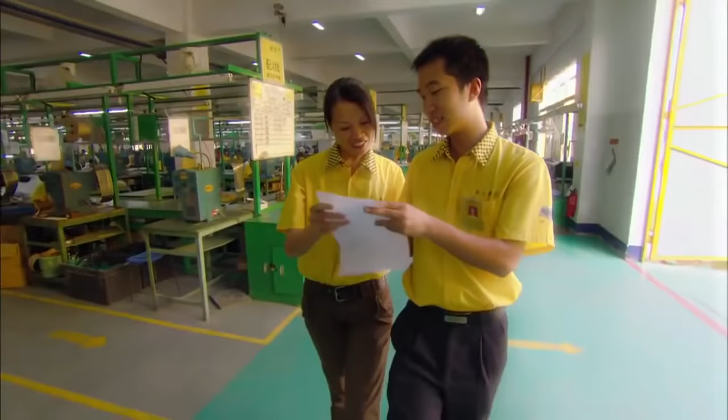What's it like to live where you work? For most of us, that's unthinkable. But imagine living and working at one of the biggest factories in the world, a workplace the size of Monaco. For these 17,000 employees, it's reality. They come from all over China, seeking a brighter future at this factory called UPA.

Workers craft coffee makers, irons, and electric grills in staggering quantities every single day. But UPA is more than a steady paycheck. It's home. People get married here. They send their kids to school here. But the work never stops.

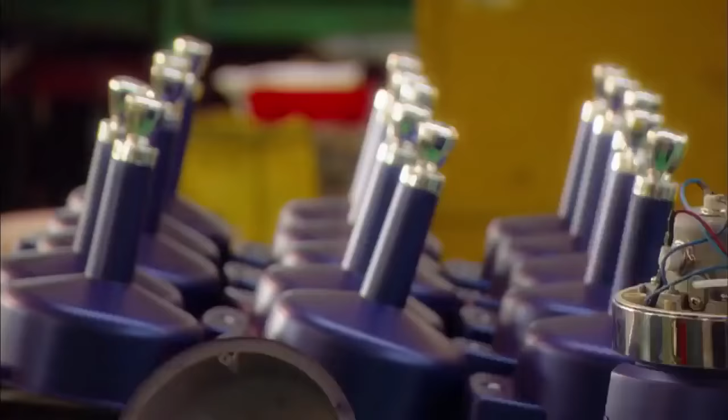UPA's managers are on a mission to produce new products for every corner of the globe that could forever change the way we think of made in China. Step behind the closed doors of modern China into a factory the size of a city.

Welcome to the place that calls itself Factory of the World. By the time you finish watching this program, UPA's 17,000 Chinese workers will produce nearly 20,000 electrical appliances.

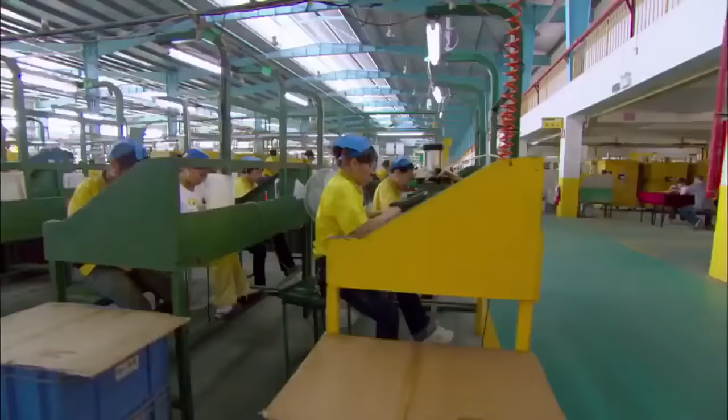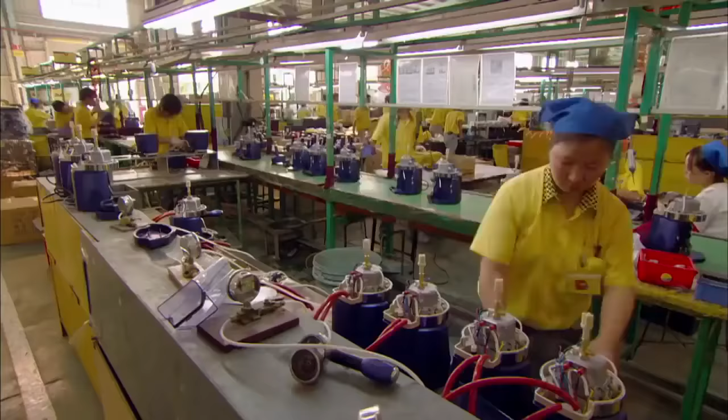Every day they churn out 60,000 irons. Every month, UPA makes 36,000 coffee makers. That's 2 new machines for every Starbucks on the planet. And every year, these laborers produce a staggering 18 million electric grills. Stacked side by side, they'd span the Atlantic from New York to London.

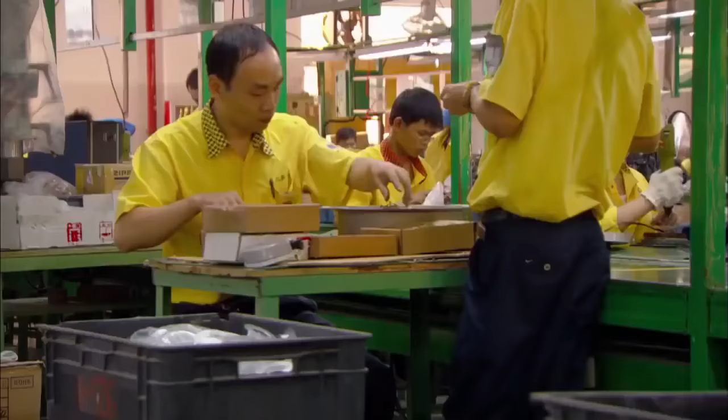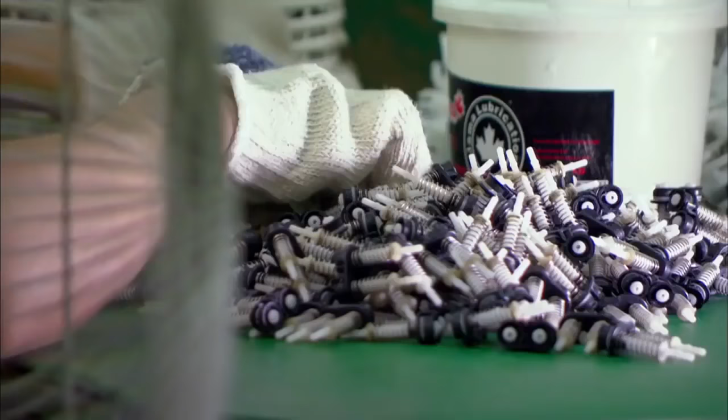Chances are you own something built right here. Factories like these don't exist in North America or Europe, but they're not uncommon in China, where labor is cheap. UPA runs on human sweat alone. No need for robots. To ensure non-stop production, workers need a steady stream of parts.

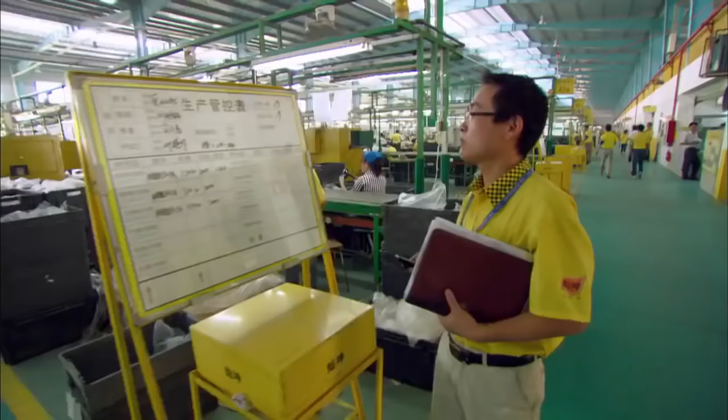I'm in charge of production control. Production control is the brain of the factory. Its main function is to coordinate each department.

If any of UPA's factories run out of parts, Mr. He's job is on the line.

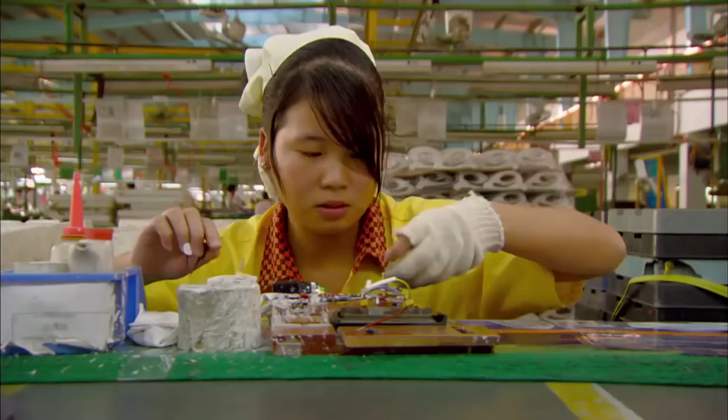The production line cannot wait. We have to guarantee that our production is smooth. Running out of materials would affect our efficiency, affect our productivity, and affect our revenue. So I have to fix this in the shortest time possible.

Today, a problem at the iron factory needs smoothing out. Workers on the iron line are low on a crucial part.

To keep up production, they need 2,000 units, and they need them now.

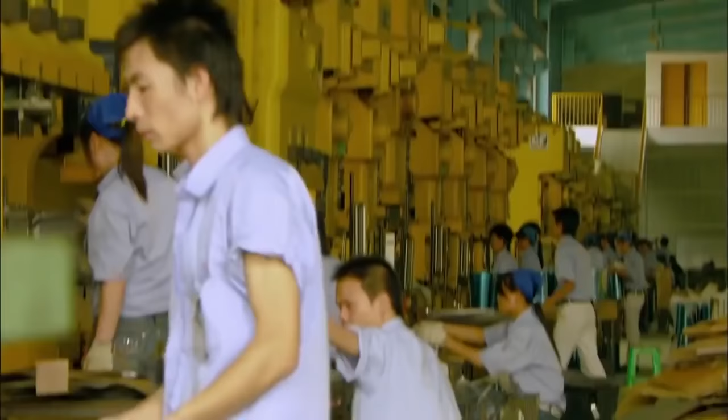Traditional plants use outside suppliers for their components, not UPA. To slash costs and stay competitive, UPA builds its own parts on site. So Mr. He's supplier is only a bike ride away.

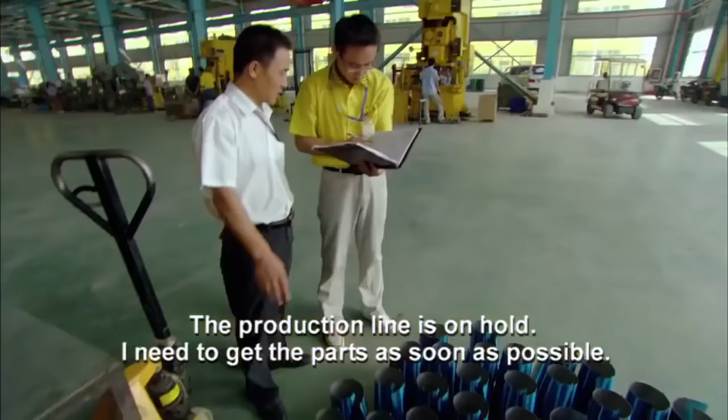But even the supplier is dangerously low on stock. Mr. He has found barely enough parts to last the day.

Then he gets another urgent call, now the grill factory is low on a crucial component.

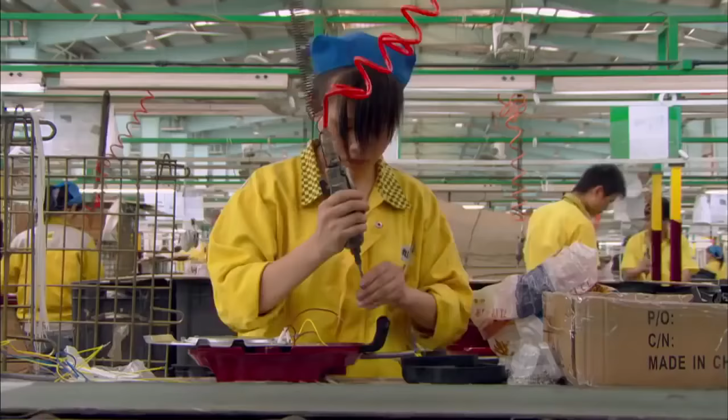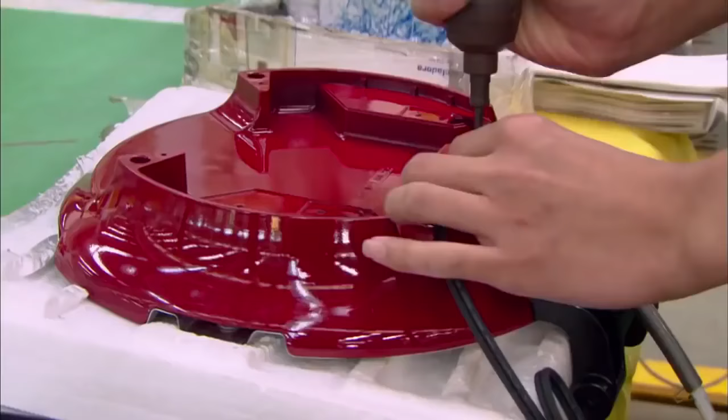Grills are the company's most profitable products. Yupa started producing one line of grills in 1994. Now, 60 assembly lines churn out 800 different models. Workers make one grill every 12 seconds. That's 50,000 grills per day, or 1.5 million per month, enough grills for every person in Dallas. Grills bring in $350 million a year, but Yupa wants more.

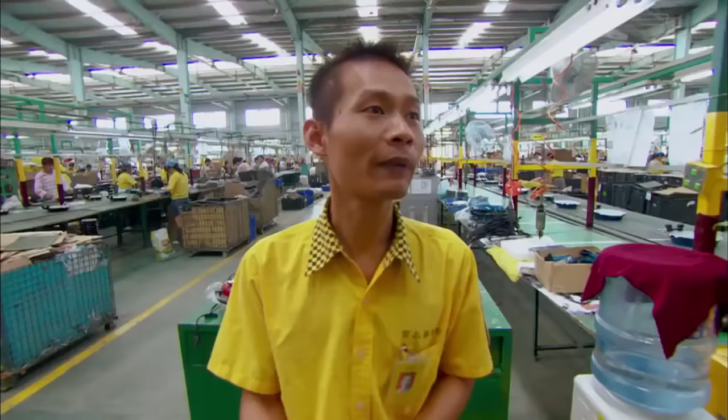Little wonder Lu Jinye acts like a general leading his troops to war.

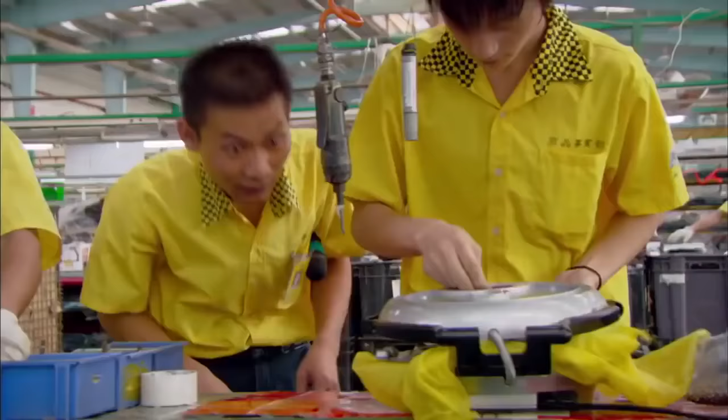By next year, managers expect workers to crank out $500 million worth of grills. Yupa's profits have to rise to outmuscle the competition. Mr. Ye supervises 850 workers on 30 lines.

We have to coordinate all these workers and pull all their thoughts into one. It takes teamwork to accomplish our goals, to get the results we want.

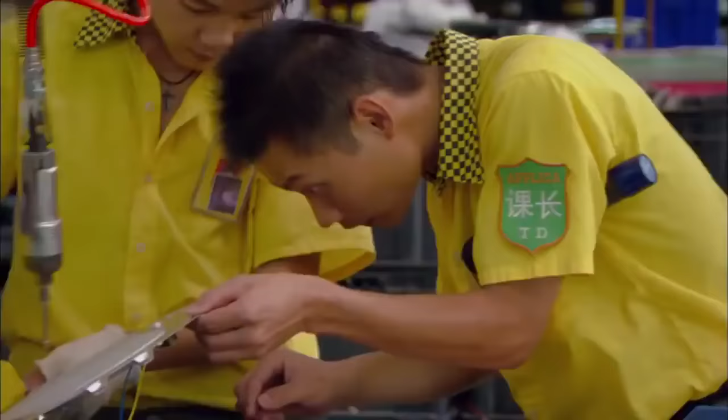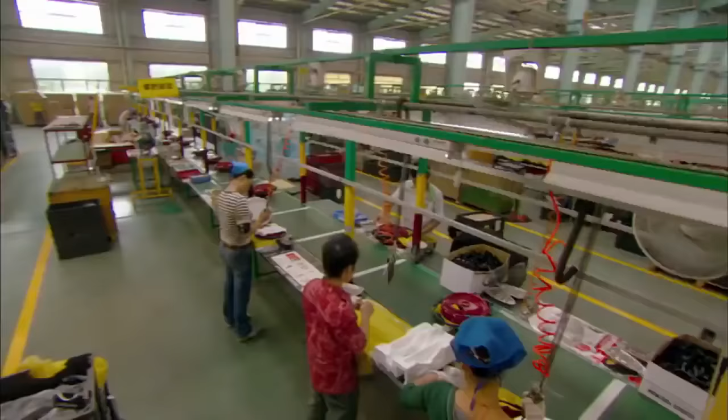Mr. Ye is obsessed with quality control. His aim? Boost output without compromising quality. In a factory this big, with a production run so massive, even the hyper-efficient Mr. Ye hits a roadblock.

This holder piece holds the grill plate. What we're seeing now is the assembly of this piece. The problem is the size. It's the wrong size.

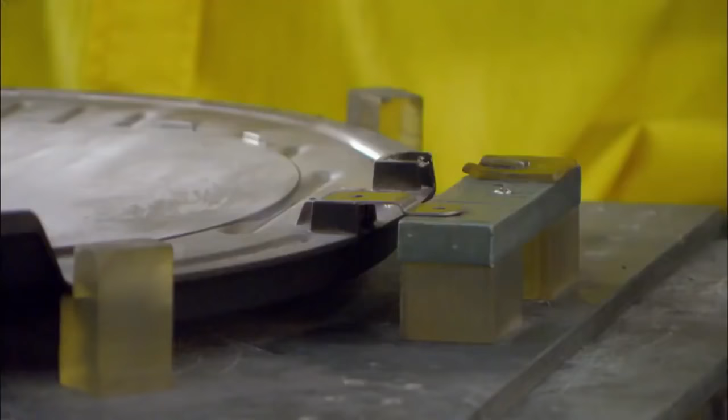They've run out of part number 2627. It attaches the core heating element to the frame. Without this simple component, assembly lines will shut down, unless Mr. Ha finds a fresh supply, and soon.

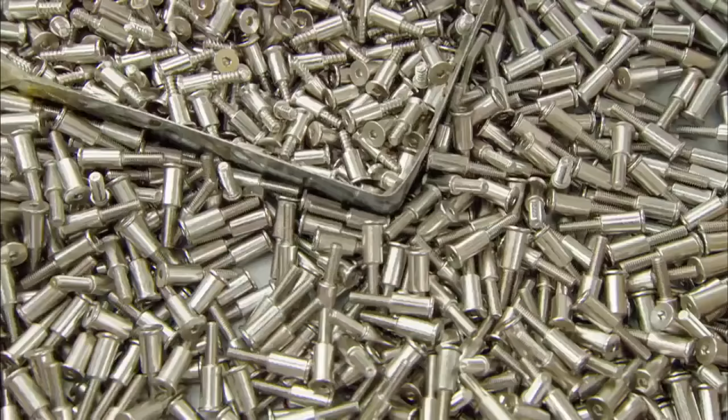If we don't get them the parts, 6 production lines will have to stop. When every part is on hand, grills assemble like a simple puzzle. Wires are linked to the heating element, and the element is fixed to the plate.

When it's not locked down properly, it will fall off. If it falls off, it will burn the hands of our customers and consumers. This job is very important.

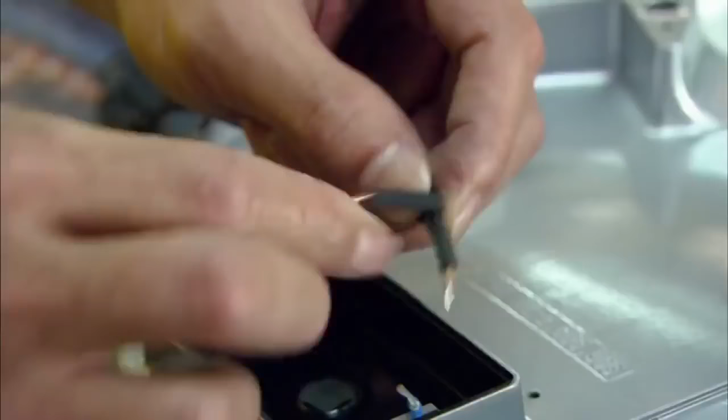Then it's time to connect the power cord. The brown wire is live and the blue wire is neutral. The one with the writing on it matches the brown wire. Connect them and that makes the wire live.

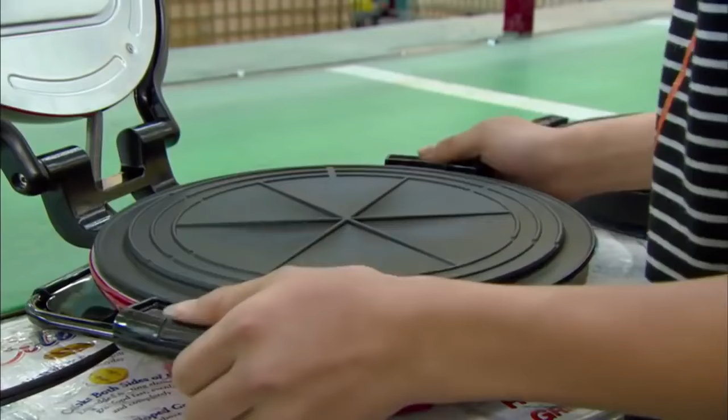Each grill is inspected for flaws in construction or appearance. Finally, every grill is tested to make sure everything is in working order.

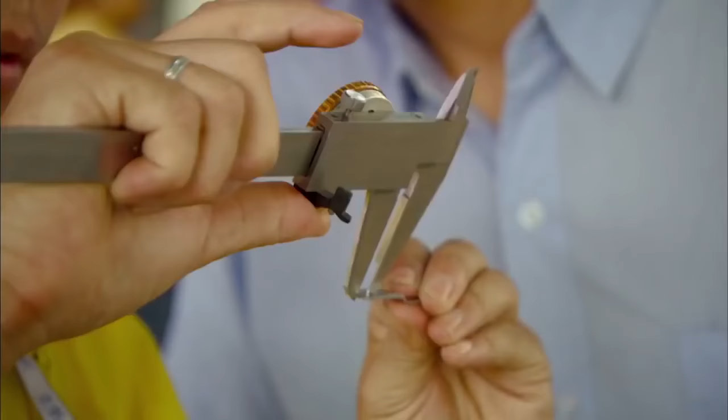On a typical day, Mr. Ye's team must make 700 of Yupa's 50,000 grills. Missing parts cause delays, cost Yupa a fortune, and force workers into overtime to meet their quota. Finding the missing parts falls to Mr. Ha, and the pressure is on.

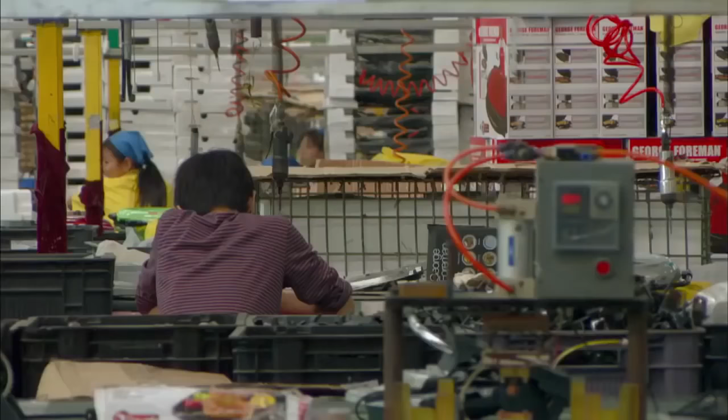Mr. Ha finally arrives, and he has good news.

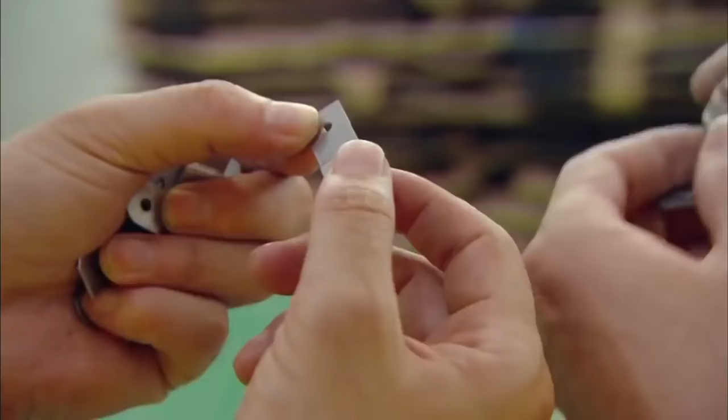Mr. Ha's day has ended on a high note.

He heads home to a company-subsidized apartment only minutes away.

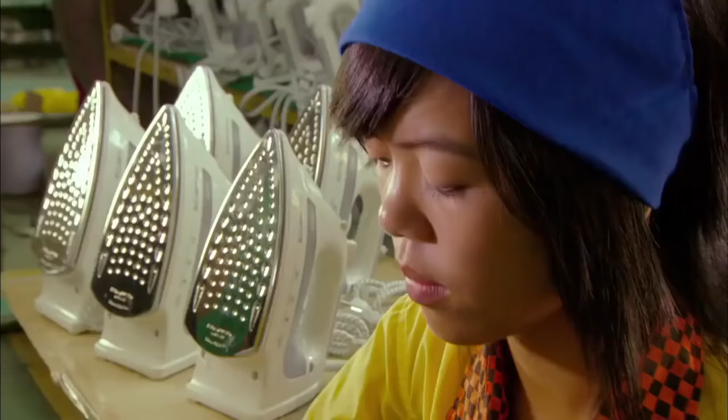It was really tough in the beginning. EUPA's next generation of workers must leave their families behind and devote their lives to the company.

It's a place tourists never see. The new face of modern China, competitive, hungry for profits, and ready to take on the world. Located near the city of Xiamen, the EUPA complex sprawls for 1.8 square kilometers, almost the size of Monaco.

We have about over 20 buildings here. You know, the largest building is equal to 4 football fields. You can have 60 to 70 assembly lines. Each assembly line can have 25 to 35 workers in the line.

25 years ago, there were no factories here, only farms. In the 1980s, the Chinese government decided capitalism wasn't so bad after all. The communist regime established so-called special economic zones, designated places for free markets and foreign investments.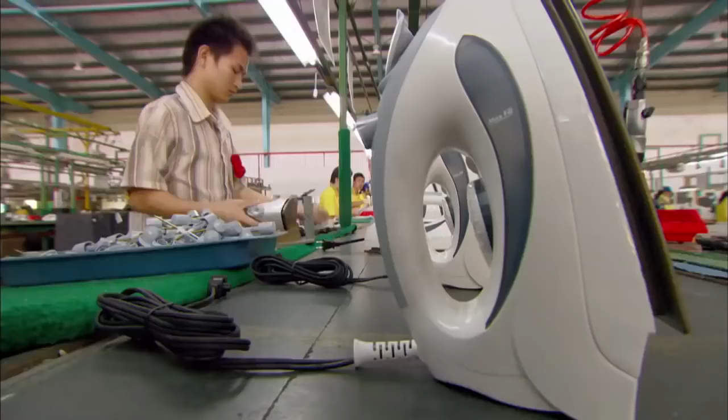Yupa, a Taiwanese company, moved here in 1988. In a few short years, it became the largest manufacturer of irons, electric grills, and espresso makers in the world.

Yupa is a city unto itself, with restaurants and convenience stores, soccer fields and basketball courts, and living quarters for everyone from students to families. Success made it big, and size keeps it successful. Mass production runs push down costs.

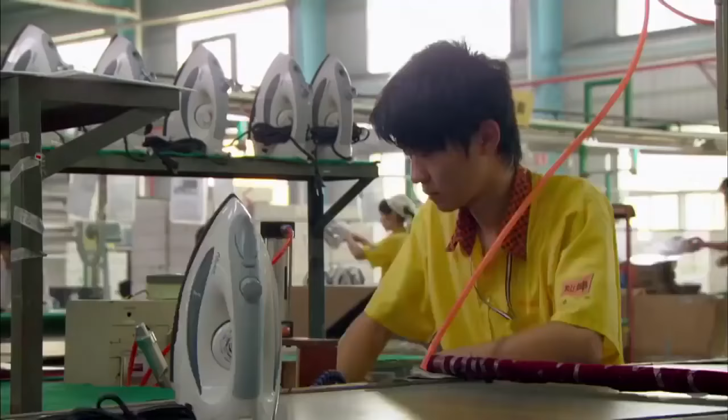Almost all parts are made on-site, keeping supply costs low and parts within easy reach. Because we are in this location, pretty much isolated, we don't have satellite suppliers surrounding us to build parts for us. So we had to do it in-house, and we had to do it on a large scale.

Yupa's main advantage is a cheap and endless labor force, ready to work for a fraction of a Western wage. 16-year-old Mao Fen Guo left her family and came here in 2008.

But Guo isn't just looking for work. She's here to escape poverty and make her mother proud. In China, many parents prefer sons to daughters.

My mother has only 2 daughters. She's always upset about that. And in order to not let her down, I must work harder and harder.

Guo is a worker in training. With about 1,000 other students, she attends Yupa's on-site trade school. To get here, she had to pass entry exams and pay Yupa tuition. Now she's enrolled in 3 years of study and hands-on training at the factory. If she does well, Guo hopes for a job at Yupa.

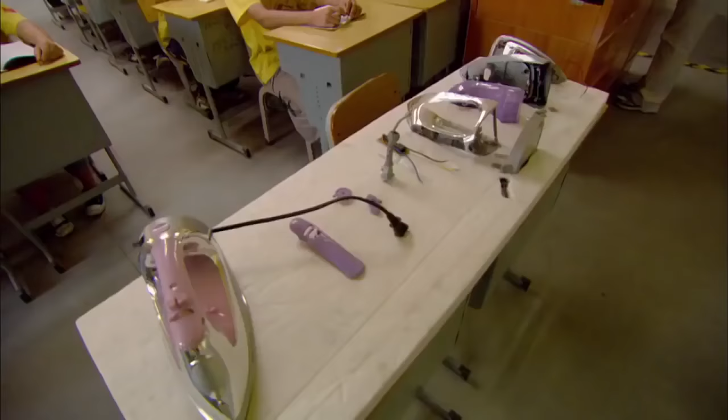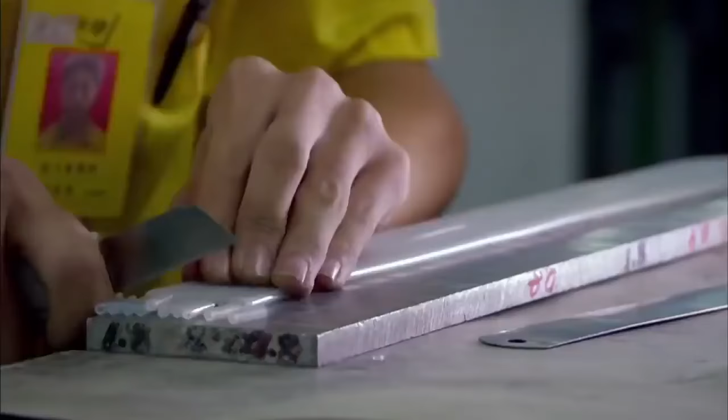To get a job, Guo must learn the ins and outs of every product line. We're changing constantly. Last time, we were making grills. Then we changed to coffee makers, and now electric irons.

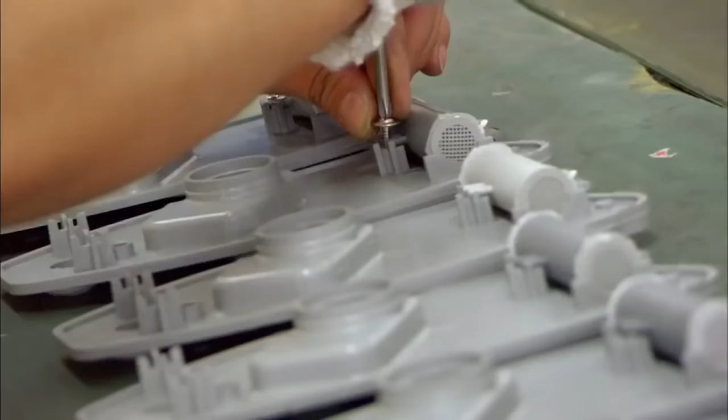Workers on 27 production lines pump out an iron every 15 seconds, and as many as 60,000 irons a day. Production includes at least 10 separate brands for dozens of companies. With over 30 steps to assembly, iron making is intricate work, and there's no room for error.

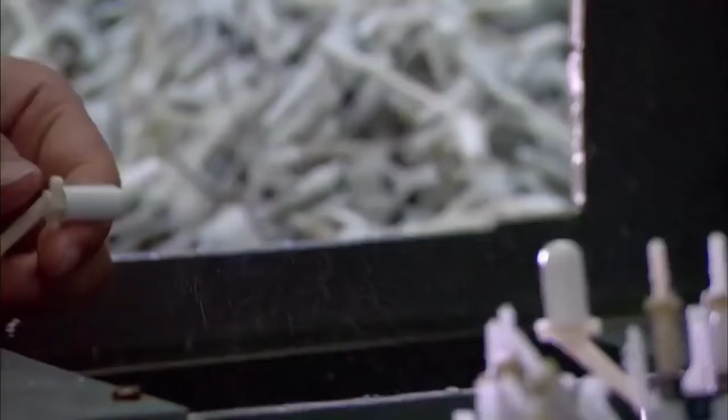Assembly starts with a water spray unit, made up of springs, rubber, and washers. With training and practice, it snaps into the spout in seconds. If it's not closed tight, it will leak or blow.

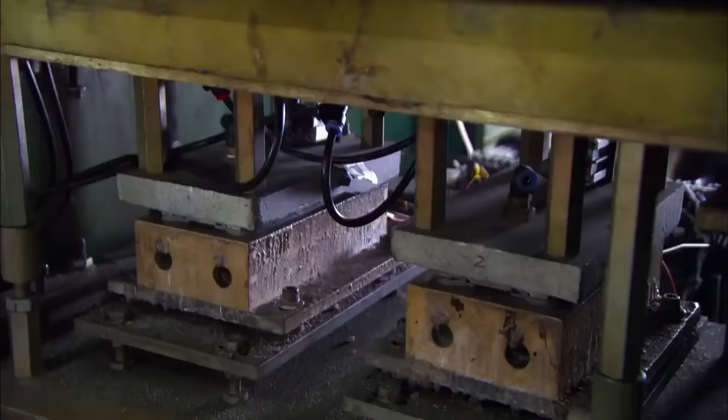Then it won't work properly. Now the sprayer and spout are joined to the handle. The two parts of the water reservoir are placed in a heating machine, which melts the seam between them and makes the reservoir watertight.

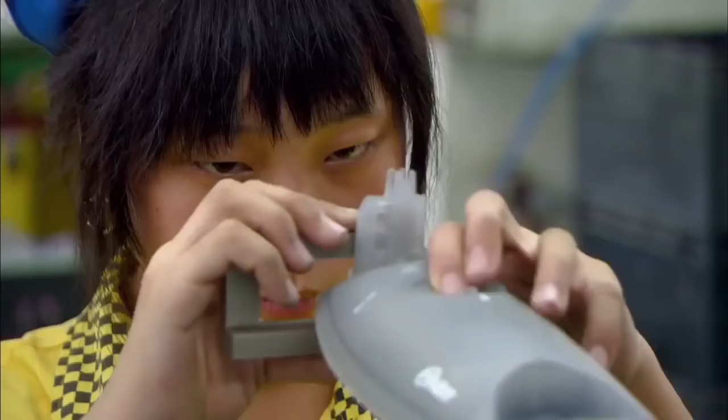Welding is an important part of production. However, it will be easy as long as we follow our operational guidelines. Next, the thermostat is attached to the base.

You need to make sure you're using the correct base before you insert it. Using the wrong base can lead to fire. Wiring is also important. Where there is a wiring mistake, there's hidden trouble.

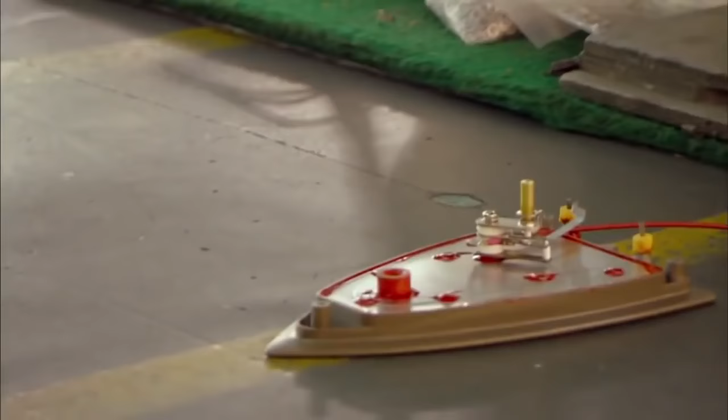A plastic buffer is placed between the heating element and the handle to keep the handle and the user's hand from getting too hot. After that, the plug is welded to the back of the iron.

We're connecting the wire for the power supply. I can do about 4 to 5 pieces every minute, and 300 pieces an hour.

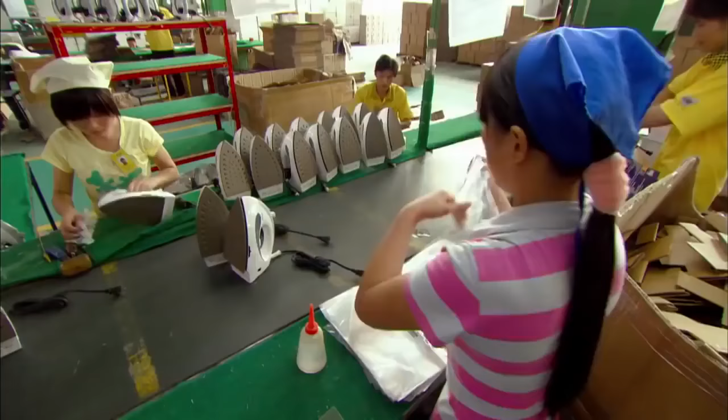Once the spray and steam buttons are attached, it's testing time. First, the steam and squirting functions. Second, the iron's electrical system. Faulty units are either repaired or removed. Finally, irons that pass inspection are packed up and shipped away.

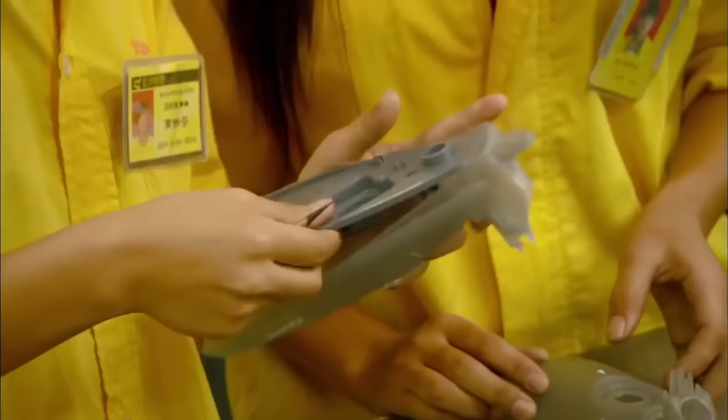The team won't cut corners or settle for second best. Today, Guo and her classmates will put classroom theory into practice and work the iron line. For a teenager from a small town, living and working in a giant factory can be overwhelming.

My life is not as hard as it was before. I'm getting used to this place now.

Work on the iron line goes better than expected. For Guo, juggling work and school isn't that difficult. The hard part is leaving family and living far from home.

I guess it's learning how to be independent. When I first arrived here, I didn't know anyone else, and we all have to live together. It was really tough in the beginning.

Like China, Guo is adapting to a new world of high technology and tough international competition. And like China itself, she's determined to succeed.

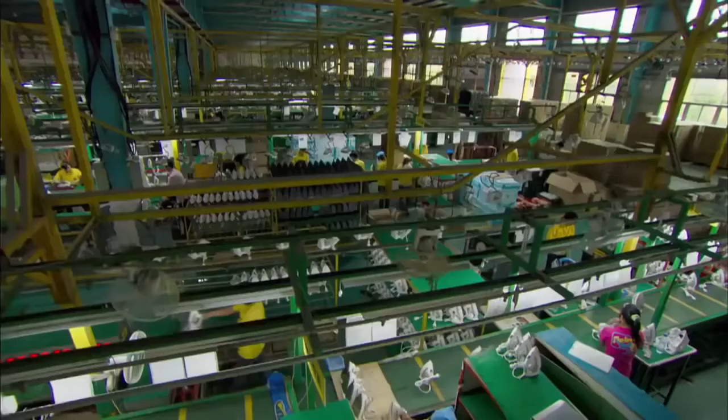I don't see myself working on the production line forever, doing the same job. Maybe I'm a bit arrogant or too confident about myself, but I want a better future.

For some people, a better future keeps them married to their job. Workers at UPA are married to the company.

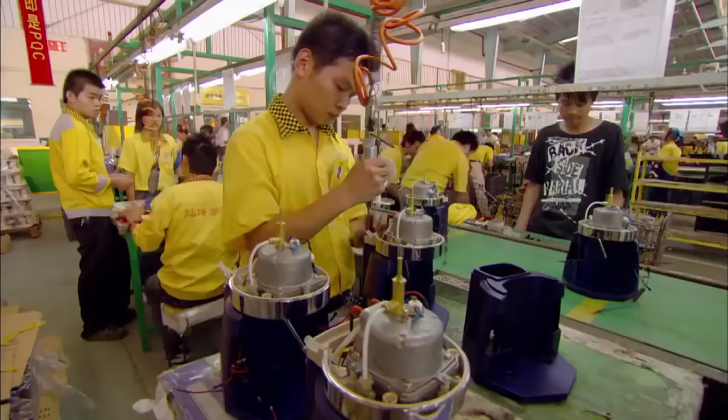Based in southeast China, UPA is one of the biggest factories on the planet. Today and every day, its 17,000 workers are getting the world ready for breakfast. In the next 24 hours, it will produce 1,200 conventional coffee makers.

Over the next 30 days, these assembly lines will deliver 210,000 cappuccino espresso machines. In the space of 1 year, nearly 2.5 million coffee makers will pour out of UPA and into the kitchens of the world.

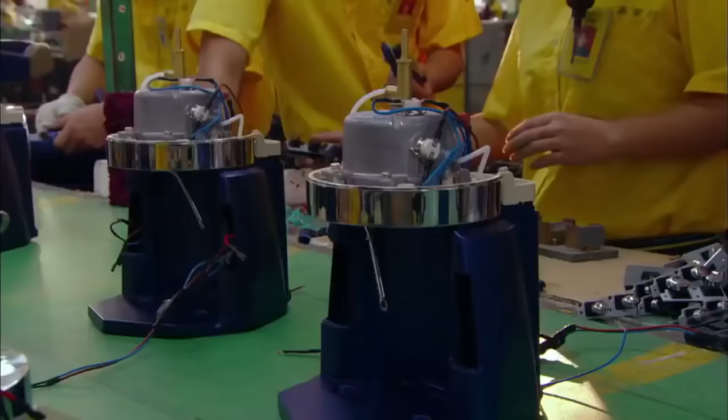At the center of all this is young Lee. We already have 200 or 300 styles, and we develop and add over 40 new styles every year.

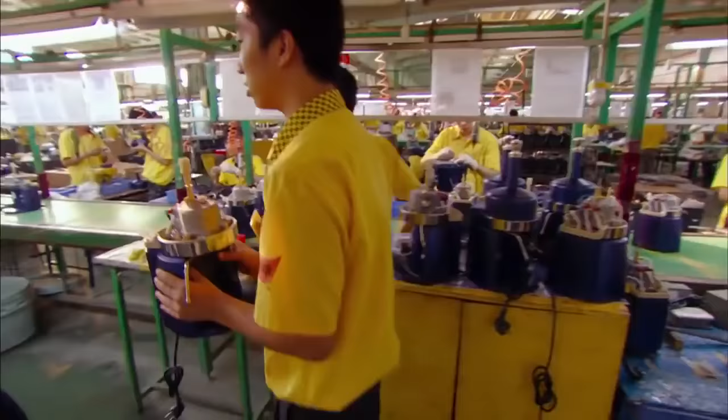Lee's mandate is crucial and broad: tackle any problem that could slow down non-stop production.

We have to make every effort to find these problems and to solve them. We have to make sure that every process is working perfectly. Manufacturing shouldn't be delayed because of these problems.

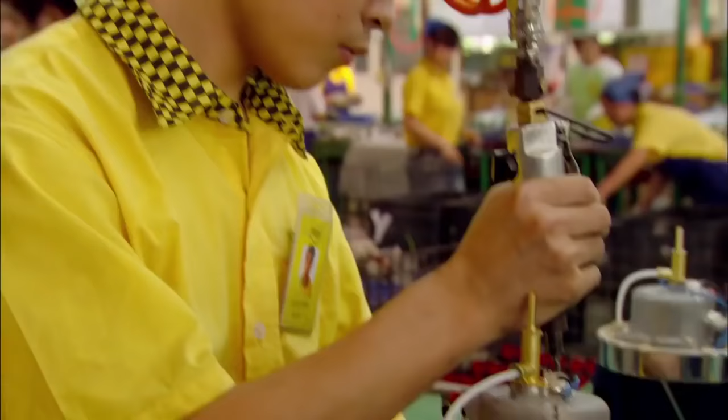Today, he's got a brand new kind of problem. One of Yupa's big clients has designed a new coffee maker. It's up to Lee to build a working prototype to entice the client into going ahead with mass production. Hundreds of Yupa jobs and millions of dollars in potential business are now in Lee's hands.

Making prototypes is a large portion of my job and is vitally important to the development of the company.

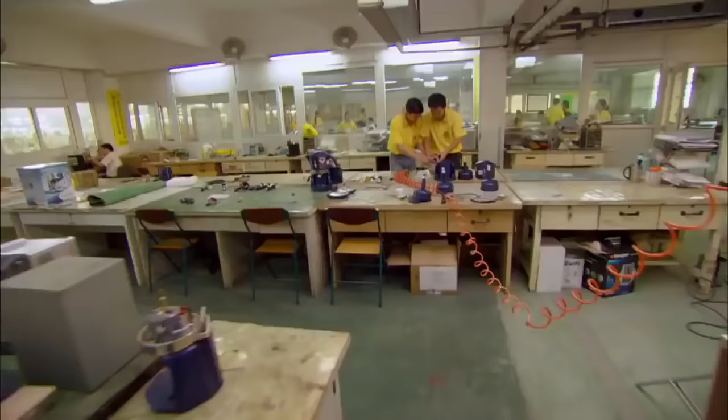Lee starts by assembling the heating system for the water and steam. Then he carefully places it into the main body. Just when Lee's ready to assemble it all, there are parts missing.

The supplier is just a walk away, a long walk, but Lee doesn't mind the distance. Someone special is waiting for him at the supply depot.

The person helping him today is his girlfriend. These perks make Yupa more than a place of work. With a workforce of 17,000, many of them married with kids, this factory city turns office space into personal space.

Sometimes we work together. For example, if we need help from the technician to solve production problems, then we meet each other afterwards.

Li Yang Lee works in the parts supply department. She first came to Yupa in 2004.

We fell in love at first sight. I always think it must be God who makes her work here and wait for me. Even now, I still think the same.

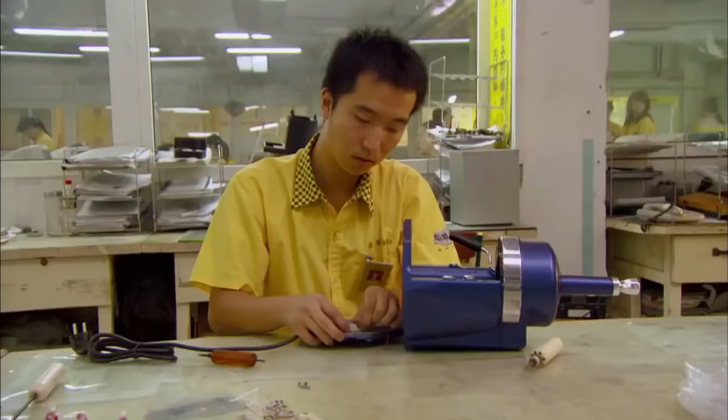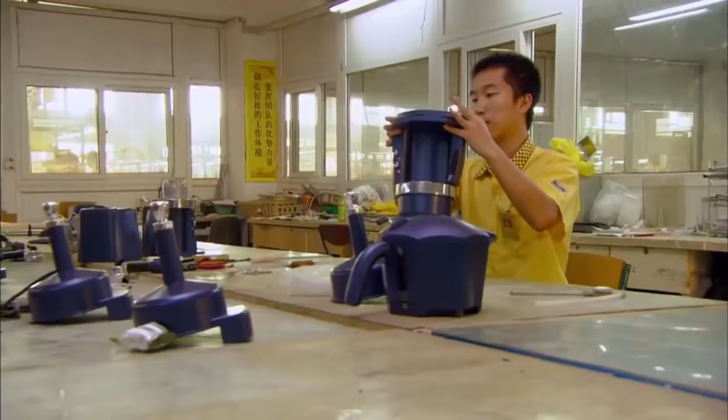With the missing parts in hand, Lee is ready for wiring. Making it all fit into the chamber isn't easy. I will have to organize all the electrical wires properly to make sure the coffee maker operates safely.

But the real test will come after shipping. If the client approves of Lee's model, Yupa could get a massive order. If it doesn't, hundreds of jobs are on the line.

If I make the prototype in a sloppy way, our customers will lose confidence in the quality of our products. It will be a great loss to our company.

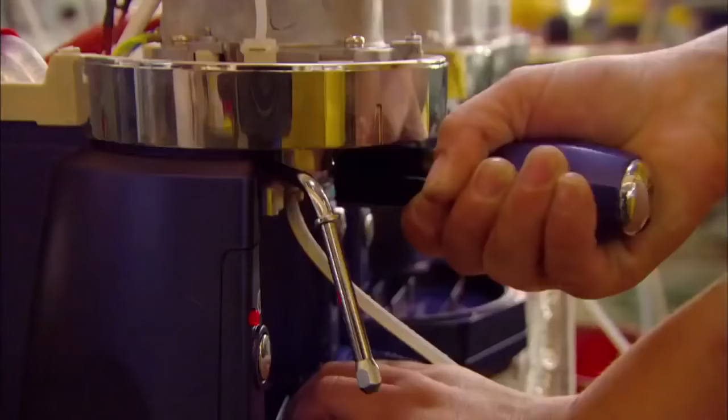Weeks later, Lee's model is approved for mass production, and right away he sets out to create a brand new production line.

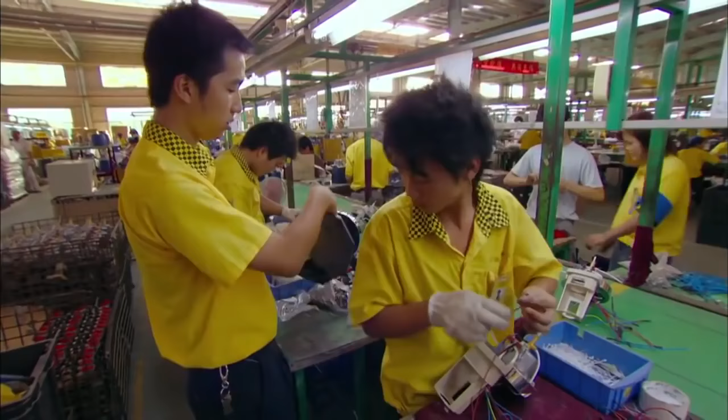It takes a week to prepare the assembly line and train the workers to make the new coffee machine. Making a coffee maker is not an easy job at all. It requires professional knowledge and a profound understanding of coffee culture. When the prep is done, Factory City springs into action and works with astonishing speed.

Lee's prototype took half a day to make. Now line workers churn out 700 machines a day.

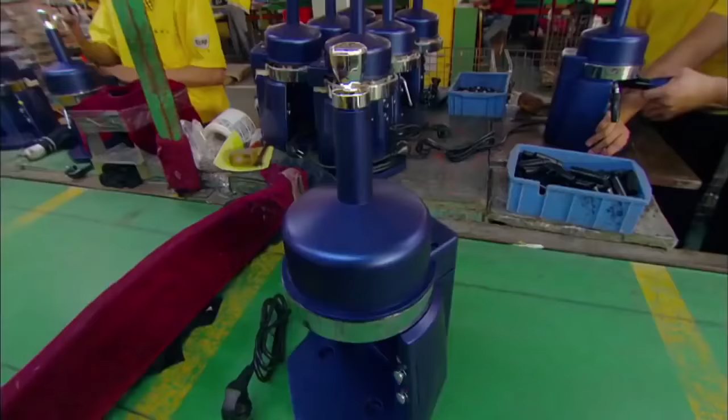Lee's shift is done, and when work ends at Factory City, romance begins. When we're done work, we normally go shopping together or take a walk. It gives us a sense of happiness.

The couple plan to get married at a mass wedding, paid for and organized by the company. All at once, dozens of Yupa workers will tie the knot, while thousands of co-workers look on.

If we take part in the group wedding, with the best wishes of all of our co-workers here, we know we will be getting married in the factory of the world, one dream. And that would be unforgettable.

A mass wedding is the couple's way of showing their love for each other and their passion for Yupa. Chef Xingming Li has a passion of his own, feeding the 17,000 workers that power the factory of the world.

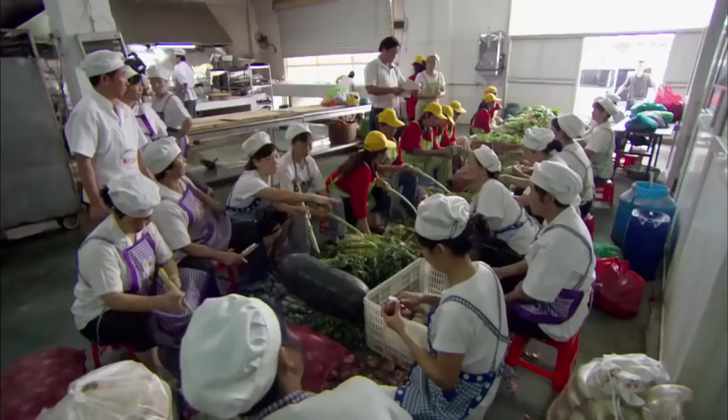In his eyes, he's not just serving meals, he's fueling the workers that power the factory of the world. If they don't eat well or eat enough, they won't have enough energy. Then they won't perform well at Yupa.

It all starts with fresh ingredients: beef, pork, bok choy, onions, carrots, and winter melon. We have all fresh seasonal vegetables here. Whatever you can find from the food market, you can find here.

Everything is washed, sliced, and diced. Yupa churns out millions of kitchen appliances a year, but there are no food processors in Li's kitchen. Nothing is automated. Everything is done by hand.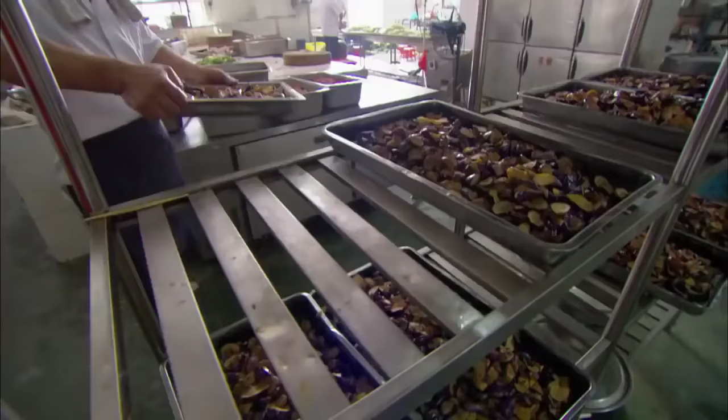By 9 a.m., Li's staff is already racing against the clock. We'll have to finish everything before 11 o'clock because Yupa staff restaurants all open at 11:30. We have to be there in advance.

In 2 hours, 3,000 workers will stop by for lunch. Li expects just as many for dinner. This means his staff of 50 must serve 6,000 meals by sunset.

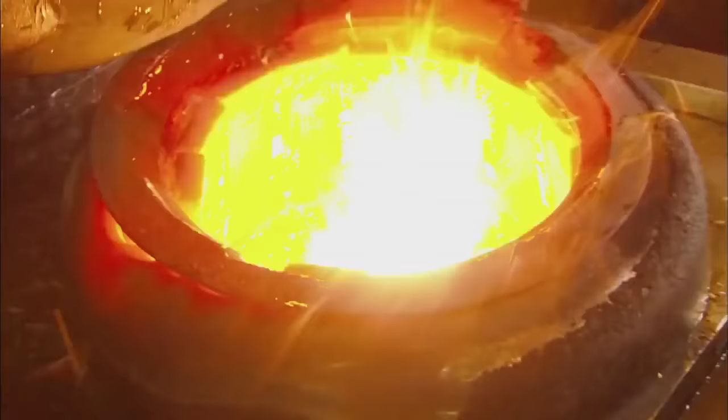That's 125 kilograms of oil, 50 kilograms of beef, and 300 kilograms of pork. That's more than 1 million kilograms of food every year. His chefs turn stock ingredients into hundreds of delicious dishes.

We can make different cuisines. Our chefs are all the best of their hometown. They cook up dishes from Fujian, Sichuan, and Henan regions, and they'll soon add halal fare for Muslim clients.

I believe everything that we cook should taste like what your mom cooks for you at home. Li's obsession with food comes from growing up hungry.

My family was very poor. Although my dad was working very hard to earn money, we still didn't have much food to eat.

Now food is never in short supply, and all of Li's clients return to work with their bellies full. Li's passion for food has made him a perfectionist. He hunts the market for produce that's perfectly ripe and reasonably priced.

While wages are even higher in big cities like Shanghai, many Yupa workers make double what they did back home, if they had any work there at all.

As with any mass organization, thousands of employees create endless demands. It's Mr. Fu's job to address all of them. He does everything he can to keep everyone motivated and committed to staying at the factory of the world.

Fu visits staff living quarters as part of his regular rounds. We're now going to the workers' dormitory. I routinely go there to check if anything can be improved. If there is, I will talk to the superintendent.

Fu is part landlord and part tenants' rights advocate. Today, he's ensuring Yupa rooms are ready for a group of new workers. For the holes in the wall, wherever there are holes, we'll find the maintenance team to repair them, then repaint.

Average rent is only $6 per month, but the type of accommodation depends on a worker's rank and the amount of money they are willing to part with.

In the global marketplace, there's no room for second best. To survive, companies need a competitive edge. Like most China-based companies, Yupa has relied on low labor costs, making products designed by others. But it wants to move up the production food chain. Yupa's leaders want to design products of their own. They have little choice. To thrive and survive, Yupa must develop a new generation of products.

The factory's very existence depends on it. Thousands of jobs hang in the balance.

No work means not being able to live. This is a fundamental requirement. It's how humans survive. You have to earn money to make a living, and to earn money, you have to work.

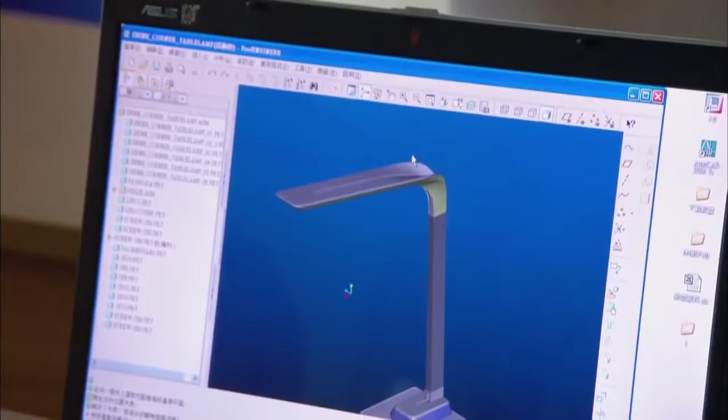Ji-Rong Pan knows how high the stakes are. He is Yupa's Vice President of Product Innovation. I think innovation is the competitive edge of our company, because our company is in the field of home appliances, and the whole home appliance industry is a lifestyle industry.

Mr. Pan sent his staff overseas to study the lifestyle products of the future. They returned with a simple message: the future is green.

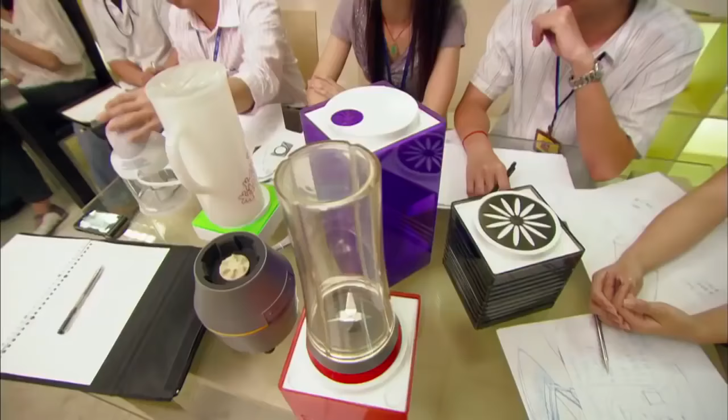We studied the consumers of North America and Europe and their thoughts on this new energy of the future. So we know that their love of the earth is actually very strong.

Pan and his designers make a bold decision. The first appliance in Yupa's new product line will be powered by the sun. It's a solar CD player.

We want to bring this clean solar energy concept into people's homes.

Going solar may sound easy, but solar panels are expensive, and they're meant to work outside, not in the dim corners of people's homes.

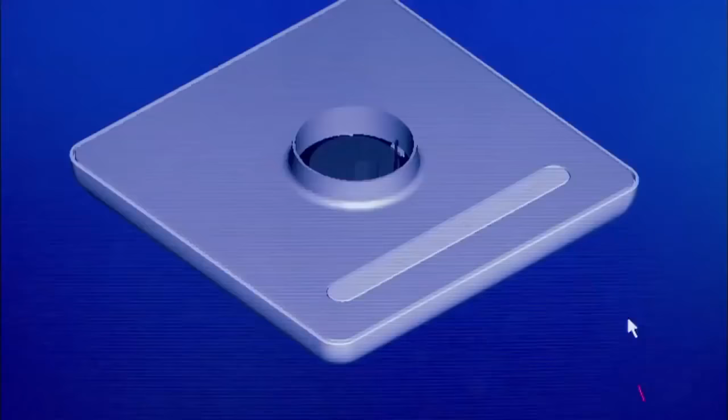A 3D image of Yupa's appliance of the future starts to emerge. Now the team must turn a digital design into reality.

This factory is a very important part of our development process. It helps turn a product concept into a finished prototype.

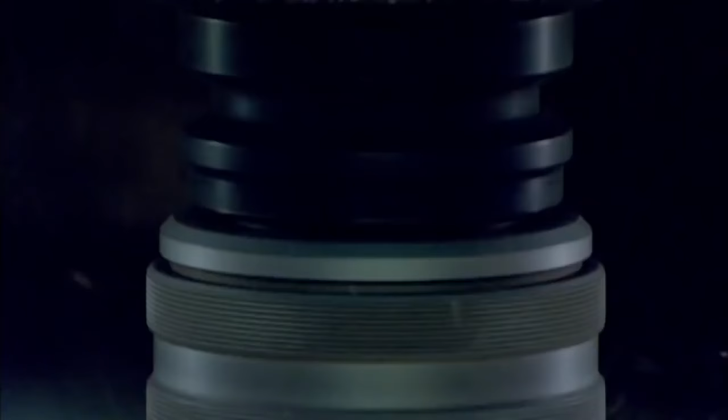Using the design specs, a computerized milling machine cuts a foam cast, and the cast is converted into a hard plastic prototype. If things go according to plan, the model will be used to produce millions of identical copies.

It allows us to test the product to see if this fulfills our requirements while bringing value to the customers.

Now engineers perfect the solar power system. The system must collect and store solar energy. Every aspect of design must maximize energy efficiency.

We've spent a lot of time studying this. What kind of technology, what kind of material, what kind of parts can help us improve our energy efficiency?

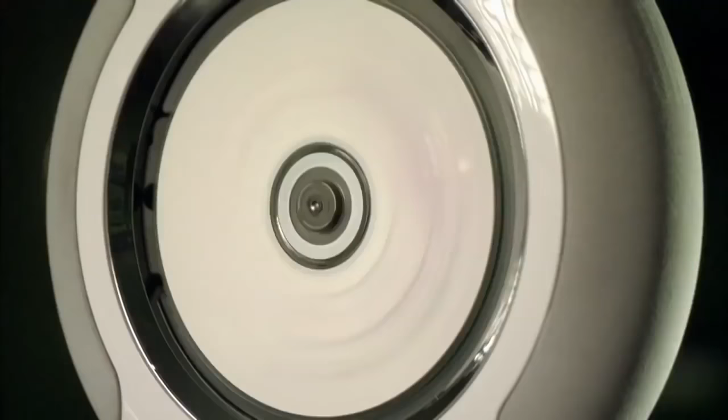Finally, Yupa's product of the future is revealed. The solar fan is simple and elegant. The player will charge indoors when left near a window. And the system is uniquely versatile. It will work with any energy-efficient appliance Yupa designs.

But one question remains: will the world embrace Chinese solar products?

We want to bring what people originally thought of as an industrial thing and truly integrate it into their daily lives, to enable consumers to truly experience solar energy. This is a very magical energy concept.

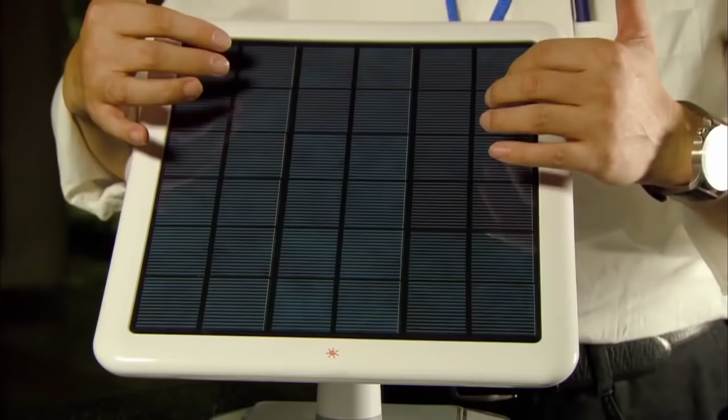If these innovative products succeed, Yupa could achieve its dream, a dream it shares with China: to be the factory of the world.

I want consumers and everyone to have faith in our products and faith in the workers. I hope everyone can enjoy the products we produce. This will make us proud.

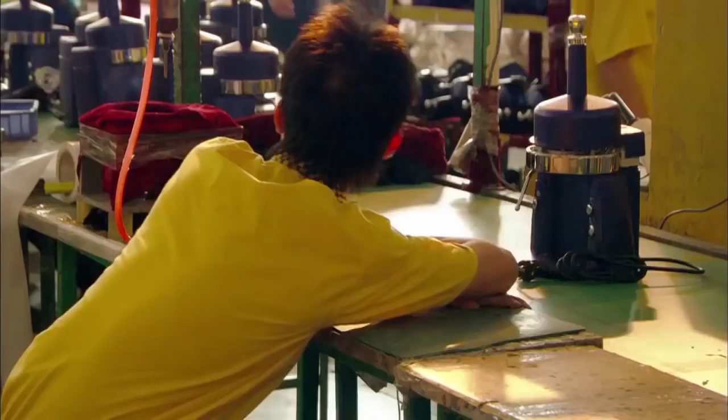With Factory City in full swing and new products in the works, more and more goods will carry the Made in China label. But for China and Factory City, growth comes at a cost. Every day, the 17,000 people at Yupa endure the stress and uncertainty of a cutthroat world economy. To fight off fierce competitors and build a better life, these men and women work and live together as one at the factory of the world.